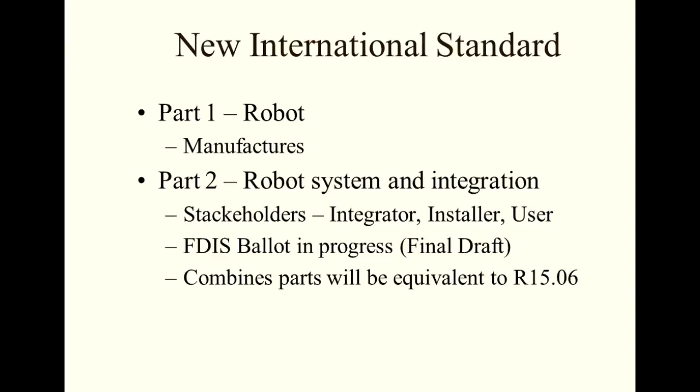We roughly deal with R15.06, revision 2012. And we don't deal in this class with part 1 because that deals with manufacturers, but we're going to deal with...

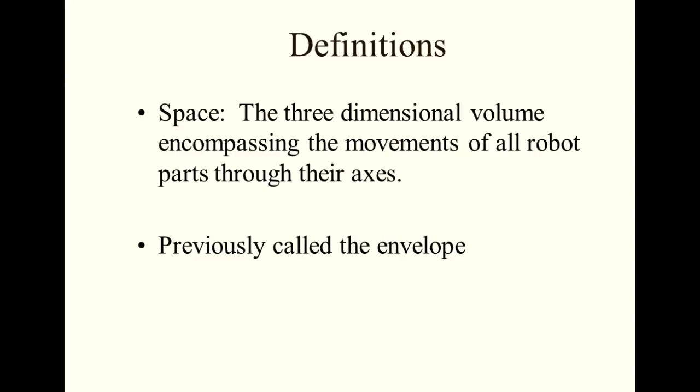We know that. Hopefully y'all know what a space is, right? Everybody okay with the space? It was previously called the envelope, but this is one of those terms that's going to hang around for years because envelopes were used for so long. But RIA revised that to refer to that as a workspace instead of a work envelope. But it's just like anything else - if a term's been used for years and years, in fact I still use the term work envelope a lot. You're okay there.

Maximum space: the volume of space encompassing the maximum design movement of all robot parts, including the end effector, workpiece and the attachment. So if that robot over there was not in a cage and it was not limited to anything, that would be the maximum space. Y'all understand that?

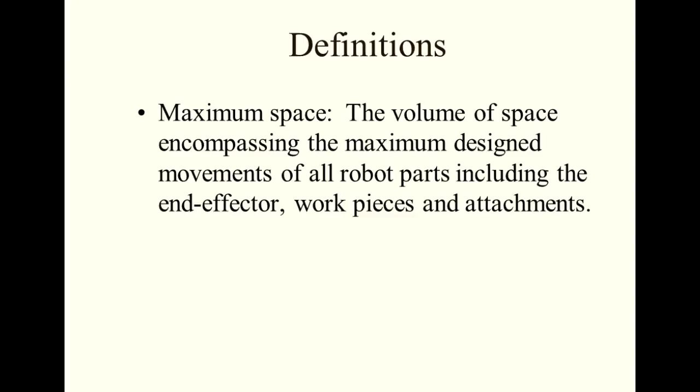Restricted space - the restricted space is within the maximum space. Every one of these robots operate within a restricted space. We've got walls up there, right, that's well within the maximum space. So we're not allowing any of these robots to go into their maximum space. Even the big FANUC over there.

If we go over and look at the big FANUC, we'd see there's these metal tabs down at the bottom that prevent it from jogging into the wall. If those metal tabs weren't there, then I would be operating in the maximum space, which means I could wipe some stuff out, right? You understand that? So these robots over here, including the gripper, the maximum space would be the maximum space that robot could move within if I did not restrict it.

So now all these robots are restricted, right? You understand that? Everybody okay? So where's the restricted space? Within the maximum space. Y'all understand?

Now, we don't want the robot to hit the wall when I write a program. Do y'all understand that? That's bad - that's what we call a collision. Just like you don't want your car to run into a telephone pole.

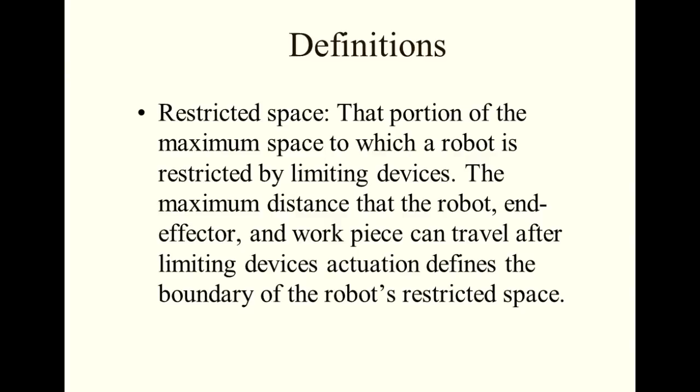So we have what we call operating space. This is the portion of the restricted space where you program the robot. So the operating space is within the restricted space, which is in the maximum space, right? You understand? Everybody okay?

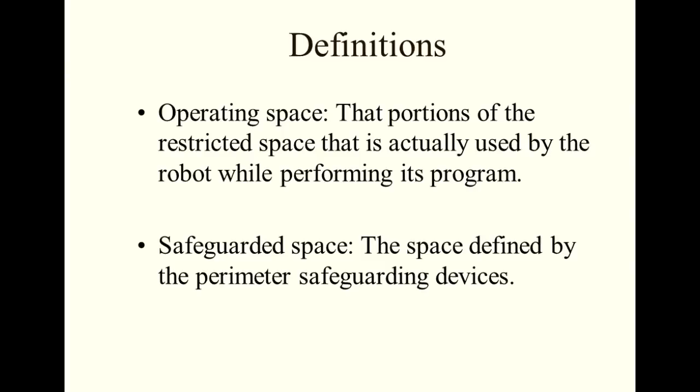And then the safeguarded space is the space defined by the perimeter safeguarding devices. So this would be all your safety interlocks that are on your work cell up there. Y'all understand?

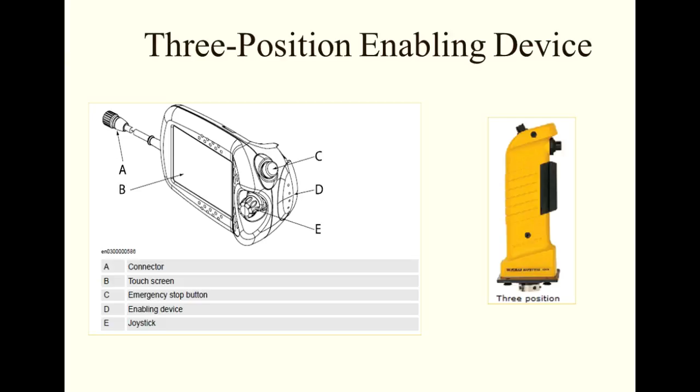Everybody understand what we call a 3-positional enabling device? What position must it be in to operate the robot in the teach mode? Center - a lot of people miss that. A lot of people said the first position. The first position is what it's in if you don't touch it, right? The second position, or the center position, is where you put it so you can jog the robot. The third position is like an e-stop - the robot will stop, right? You understand that? If you grip too hard.

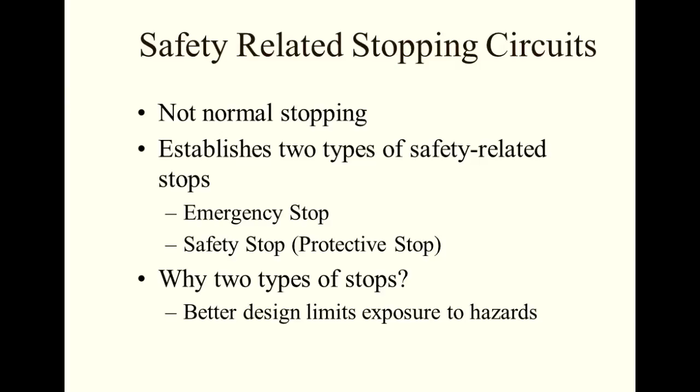Everybody within the work cell, that's working inside the work cell, must have a 3-positional enabling device. So we got emergency stops and safety stops, right? Y'all understand the difference.

Control reliable - this is what control reliable says. Control reliable is hardware. Control reliable cannot be software, because people write software, right? You understand?

Control reliable safety circuits shall be designed, constructed, and applied such that any single component failure shall not prevent the stopping action of the robot. Do y'all understand that?

So if I was to take that e-stop button apart, you would see there is actually two circuits in there - there's two switches in there. Now they're controlled by the same operator, but those two e-stop buttons go to different circuits.

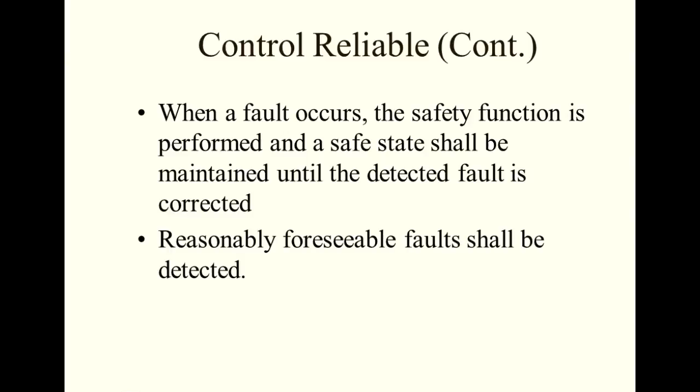So what it would look like electrically, if I drew a diagram of it, just the e-stop circuits - but this would be true for all your... where did I insert that page? I know I inserted a page.

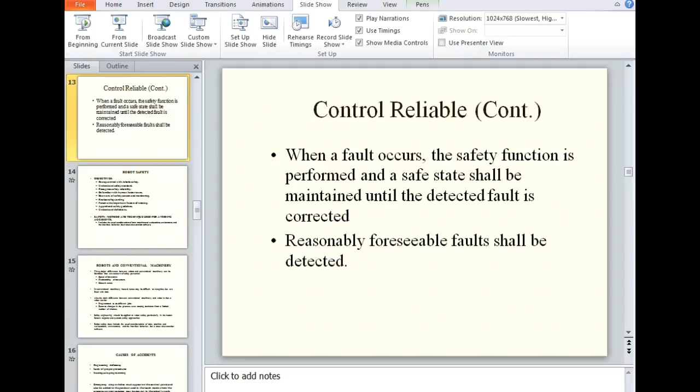So I'd have one circuit coming up. This would come up, it would go to an e-stop button. This would come down and go into its own section of the controller. We would come over here, we would have another circuit, a completely different circuit. It would come over here and have another e-stop button, and then it would go into a different circuit. So what we have on our controller is two e-stop circuits.

And these switches are mechanically connected together. So if something happens to this switch, right, you'll understand, that switch would still work. If something happened to this switch, the other would work.

If something happened to this circuit, it would still work, right? That's what we talked about with control reliable. So all our safeguards, I could use this same circuit for the e-stops. We have two mechanical switches and two circuits on the controller, so if one circuit fails, hopefully the other one's going to work. You understand? That's what we mean by control reliable.

Your safeguard circuits and your e-stop circuits on these robots have to be control reliable circuits. So when you let go of that teach pendant, the robot's going to stop, even if something's happened, even if a wire got broke on the e-stop. It would stop anyway. So this is control reliable.

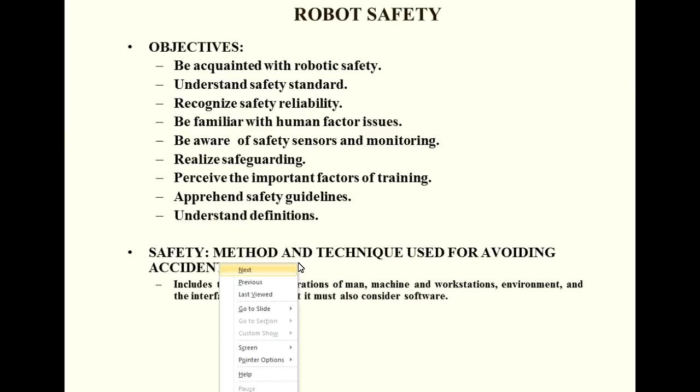What else did we have on the test that y'all messed up on? Let's see, hazards.

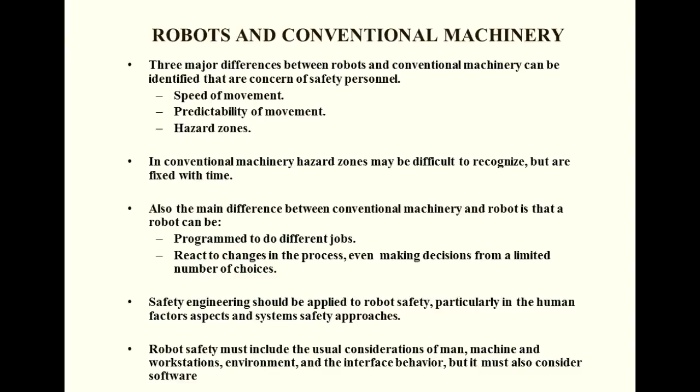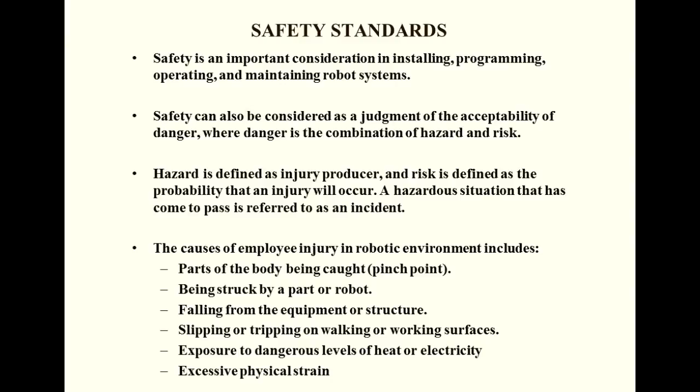Cause of accidents. Of course, a major cause of accidents in robotics is people slipping off things or falling. We have people that climb up on the robot when they're trying to do something and slip off of it. Probably the most dangerous thing is getting caught between the robot and something, a pinch point.

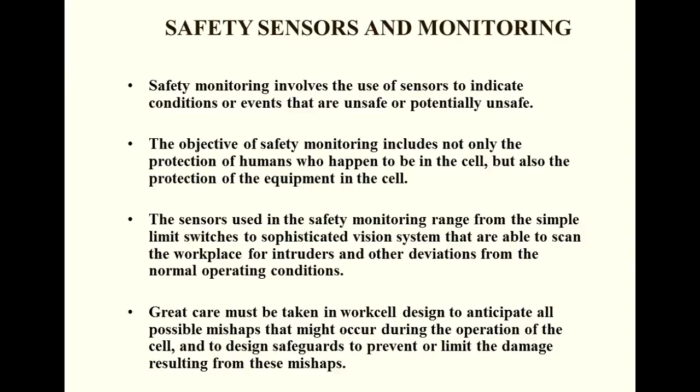So human factor. Basically, who's responsible? Safety is responsible for everybody, right? But these are the ones that y'all had problems with too.

Levels of robot safety. Level 1, these are systems intended to detect that an intruder has crossed the perimeter boundary of the work cell without regard to the location of the robot. Level 2 systems are designed to detect the presence of an intruder in the region between the work cell boundary and the limit of the robot's work volume.

Everybody understand that? Level 3 systems provide intruder detection inside the volume of the robot. All ours have is level 1. So all we can tell in our work cell is if you open the door. We can't tell if you're in between the sliding door and the robot, or within the reach of the robot. Y'all understand that?

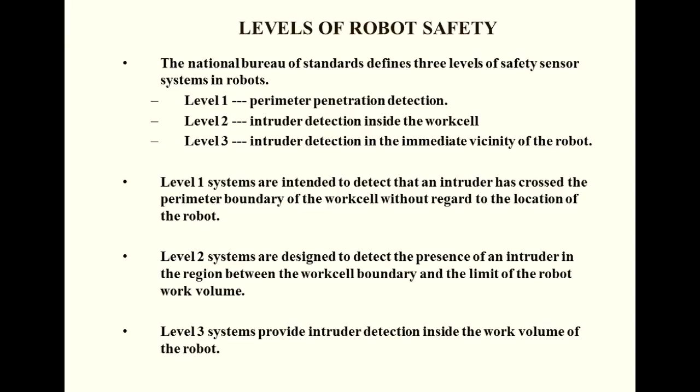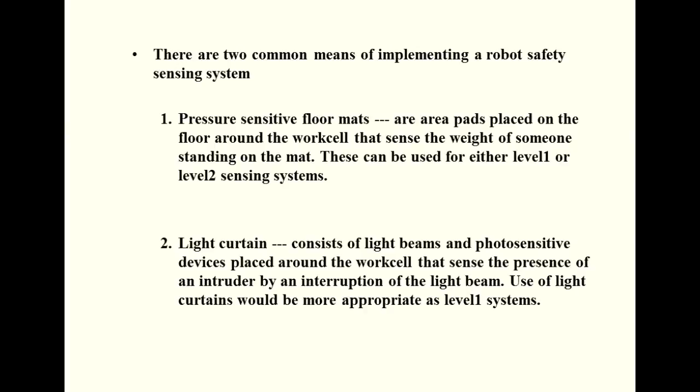Floor mats, light curtains, are you okay there? Y'all understand those? Yes or no?

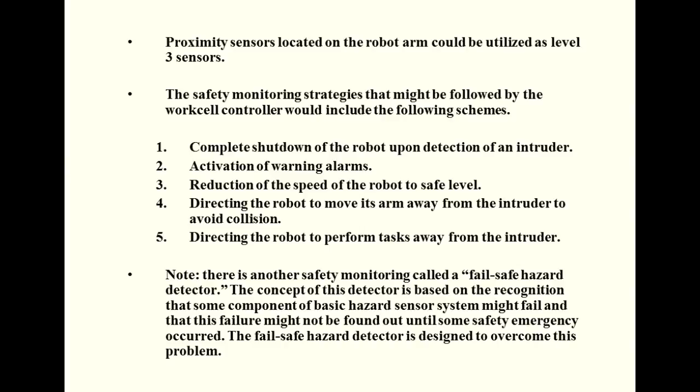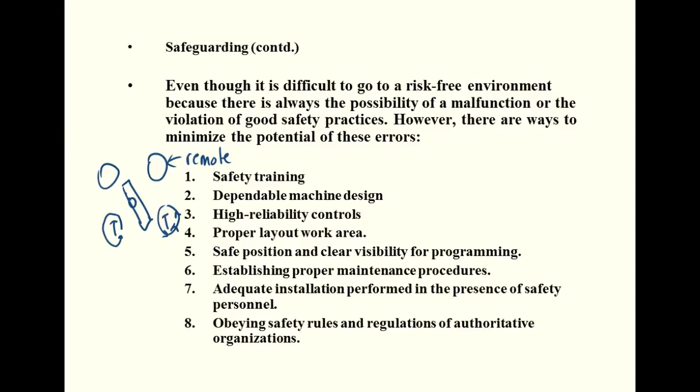Proximity sensors, let's see. Like I said, I just wanted to go over, we're on safeguarding. This is some of the stuff that y'all were supposed to look at in that safety video, and also a safety lecture, which I went over in this slide.

The only reason I'm doing this is, of course, y'all missed on the last test where most of the questions were missed on safety, which should probably be your most important feature.

You can look at every one of these robot manuals, and the first section is what? Safety. You can go out and buy a new TV, and when you get that manual that tells you how to install it, the first section is what? Safety. You can go out and buy a new electric toothbrush, which I did, and the first section of the manual is what? Safety. Now what that means is that if you get in there and you get hurt with that toothbrush, whose fault is it? It's yours.

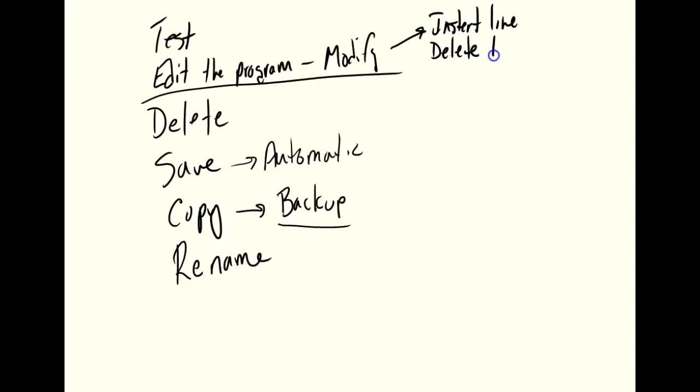What we need to do when we modify the program—somebody said we need to be able to insert lines. We need to be able to delete lines. We need to be able to modify lines. We need to be able to copy lines.

Now, modify would include changing speeds, changing round off, or actually touching up the point—that's all inside of that—or even changing the type of move. Change move, or what we call touch up. What would touch up be? That means you change the position of the point. You don't change the type of move, you change the position of the point and touch it up.

Of course, change speed, change round off. Anything else we need to be able to do? We said delete lines, modify lines—all this is what we refer to as editing. So we edit programs. When we edit programs, we should be able to insert lines, delete lines, modify lines, copy lines, or instructions—more correctly, instead of lines, say instructions.